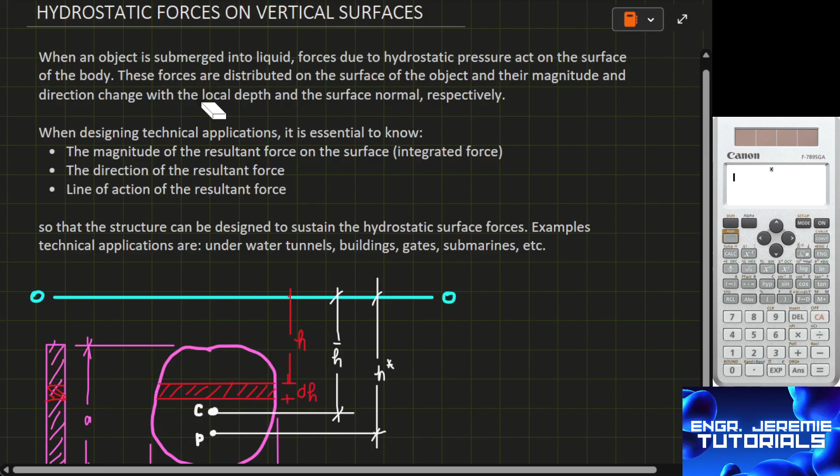When an object is submerged into liquid, forces due to hydrostatic pressure act on the surface of the body. For example, when we dive underwater in the sea, there is a hydrostatic force that pushes against our entire body, which is why we feel the pressure down there.

These forces are distributed on the surface of the object, spread across the total area of the surface, and their magnitude and direction will change with the local depth and the surface normal respectively.

So the deeper the object is submerged, the higher the hydrostatic pressure or hydrostatic force acting on the body. Therefore, there is a relation between the hydrostatic force and the depth or total height of submersion of the object.

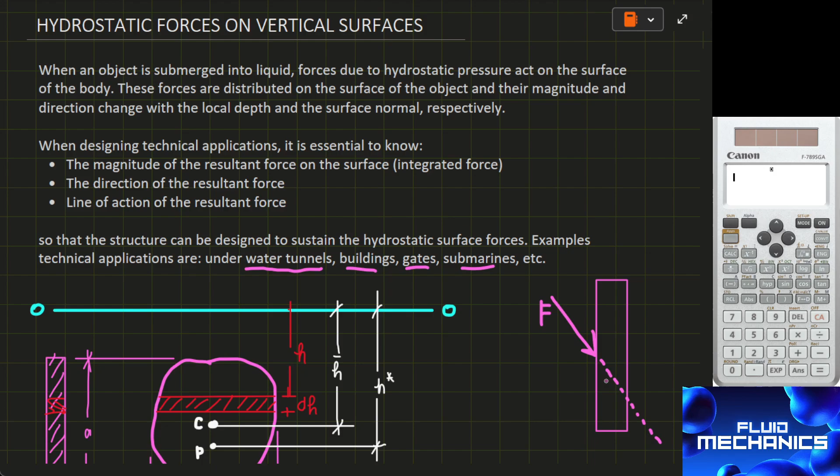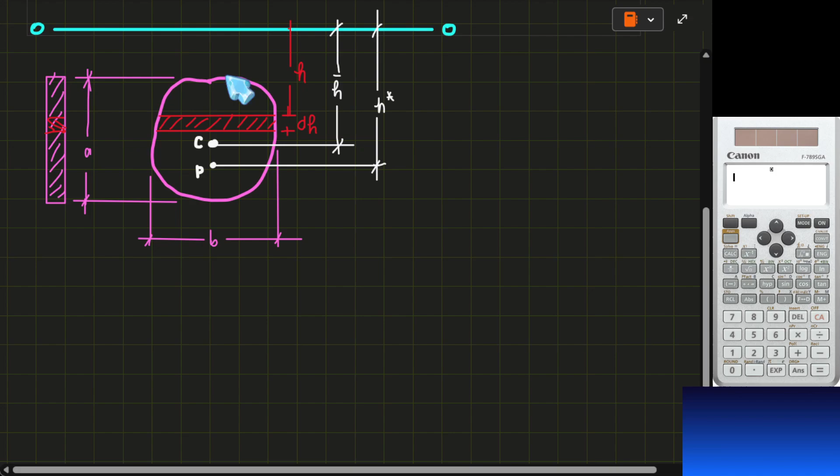Now, how are we going to solve for the total force F that hits the surface of the body? Okay, imagine we have a body - this part here. This body is submerged at a surface OO. So this is our surface, surface OO, with the body submerged in it. The point C here is the location of the centroid.

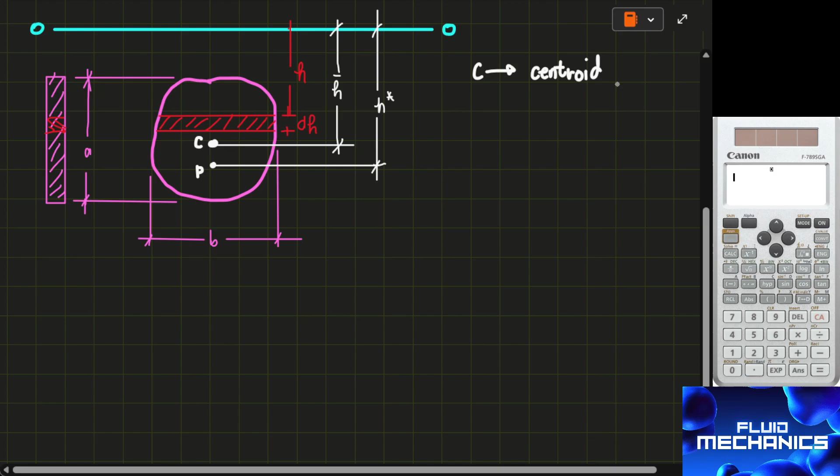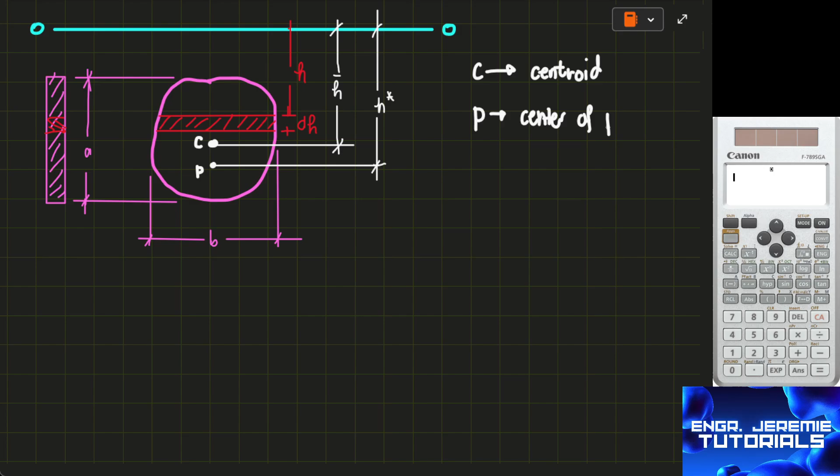The centroid - we've already learned what a centroid or center of gravity is, so that's where our center of gravity is located. And the point P here, this point P, that's where the center of pressure is located. The center of pressure varies depending on the shape of the object, because with respect to the moment of inertia of the object, that's how we locate the position of our center of pressure.

Now, in solving for this hydrostatic force on a vertical submerged plane surface, what we do is take a small differential strip here. With respect to that differential strip, we take the height h. This is our differential strip dh, with thickness dh, and its total length is our differential b, the total length there.

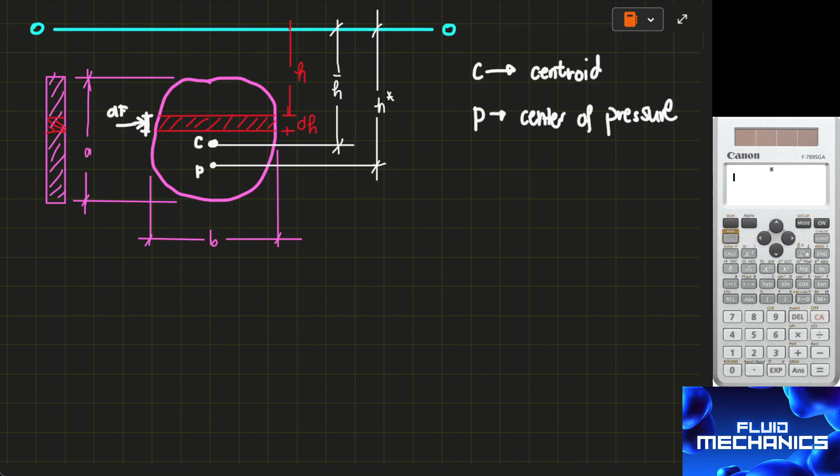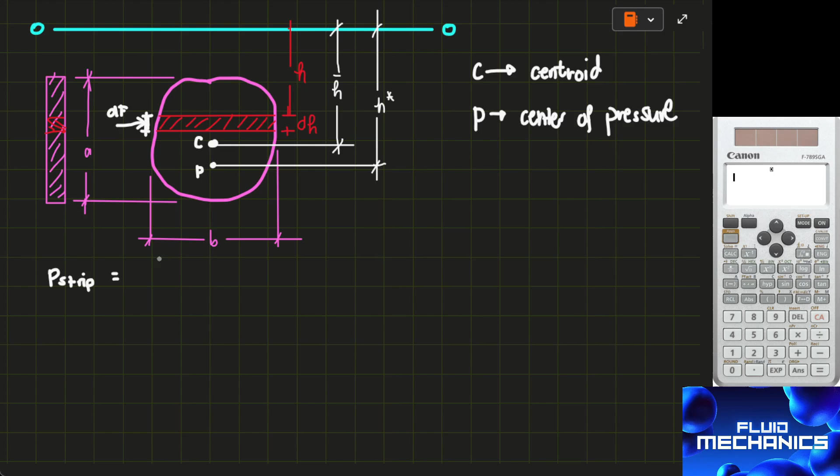Now, to determine the total force - if this is our differential strip, the hydrostatic force is the force that hits this strip. For example, the force hitting here, that is our differential force, dF. And solving for the hydrostatic pressure at that strip, that is equal to rho times g, acceleration due to gravity, times this h at the strip - rho times g times h, the basic formula.

Now, para malaman natin yung differential force na tumatama dito. Kasi 'di ba, pressure is equals to F over A. Since we have a differential pressure dito sa strip, para makuha natin yung differential force, itong rho GH i-multiply natin ng differential area o yung area natin nitong maliit na differential. Kasi itong rho GH is our pressure. Ang dF over dA is equivalent sa pressure kasi F over A ba yun. So itong dA, dalhin ko sa kabila, kaya nagkaroon ng

minultiply dito na dA. Now, to solve for the force on the entire surface, di ba, ang ginagawa natin is ini-integrate natin. So, integral ng dF is equal to the integral nitong nandito sa kabila na rho GH dA natin.

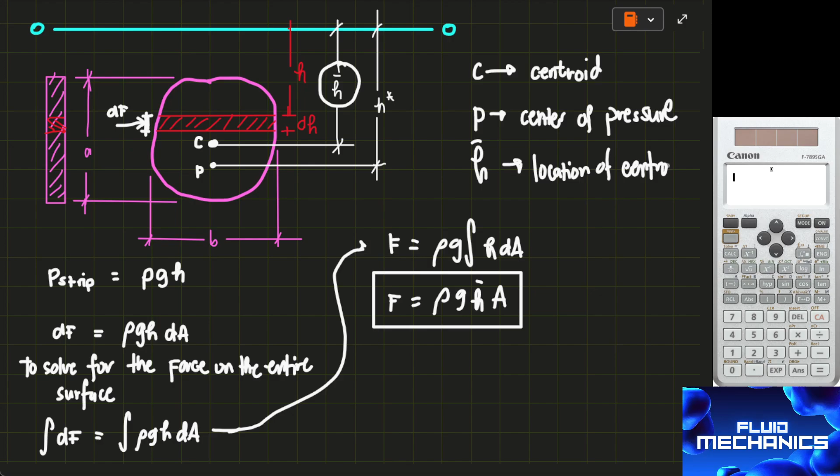Now, paano naman natin malalaman yung location ng center of pressure o yung H star natin? Kanina is H bar kasi may bar yan. Basta tandaan natin, H bar is the location of centroid or the center of gravity, yung location niya. Meanwhile, yung H star, location of center of pressure o yung COP natin. Yung P, yung point P na yan, yung H star.

Paano naman natin kukunin yung amount of the o yung height nitong H star? Okay, kunin ko ulit ito. Wait lang. Dito na lang. Now, from here, para mas madali ko siyang makuha, imo-moment ko na lang itong dalawang point, itong centroid at saka itong P from the surface. Okay, itong differential strip natin na to, kukunin ko ulit yung moment niya.

Differential moment, ito naman, location to ng center of pressure natin o yung H star. So, kukunin ko yung moment, differential moment nitong strip. So that is equal to the differential force, itong DF kasi siya yung tutulak doon sa differential strip natin. DF multiply by our H. Itong nandito sa H natin. Now, sabi natin kanina, DF is equals to rho GH times dA.

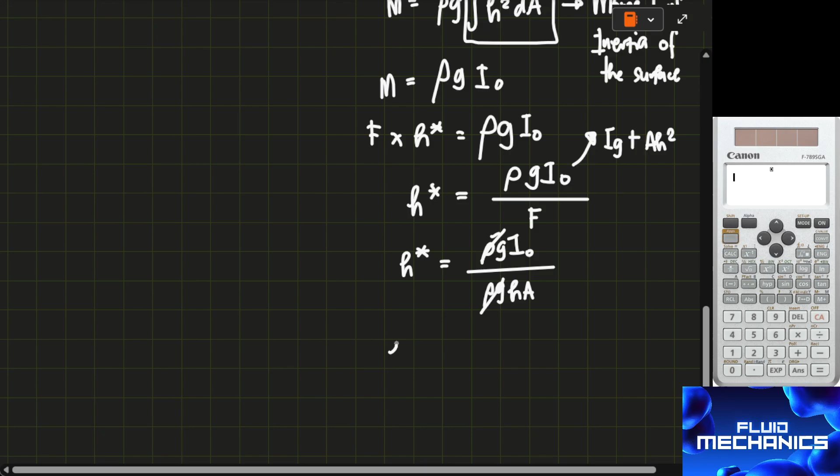So let's substitute. H star is equal to rho G I naught over rho G HA. But before that, this I naught, we can replace with IG plus AH squared. Now the rho G will cancel, so what remains is H star is equal to I naught over HA.

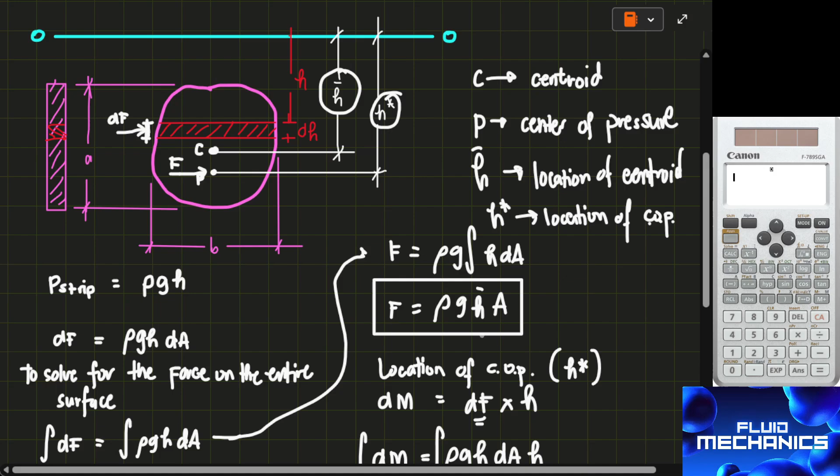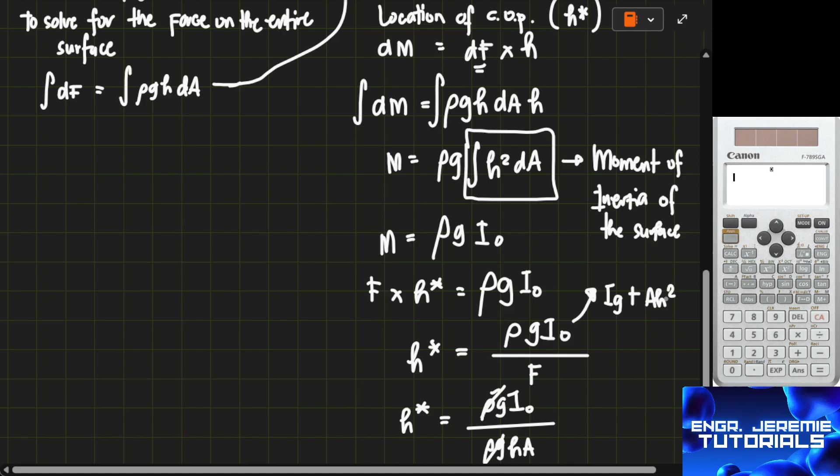Now this I naught, we can replace in terms of the moment of inertia at our centroid, using the parallel axis theorem. So we can replace this I naught with IG plus AH squared, where this is our parallel axis theorem.

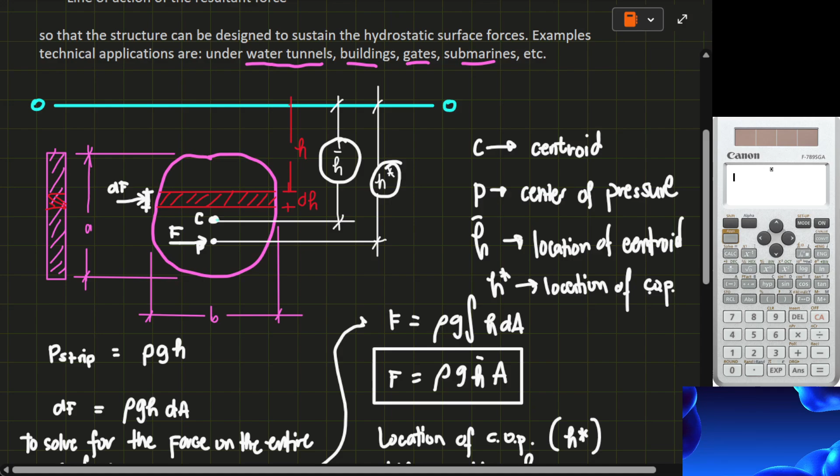This IG is now the moment of inertia of the surface at the centroid, with respect to the centroid. So our formula becomes H star is equal to IG plus AH squared all over HA or AH, which are the same.

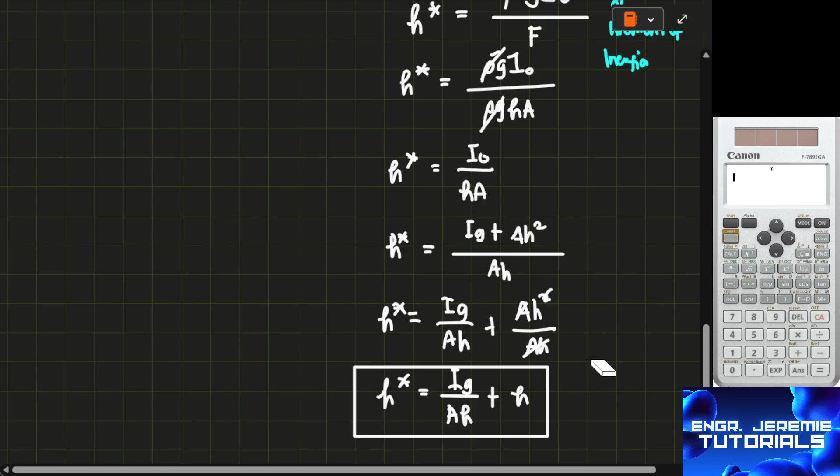So what is IG? For a square or rectangular surface, I is equal to BH cube over 12 for rectangular. It's different for circular and different for triangular, so you need to remember these formulas for moment of inertia. Let's try these two formulas we solved to solve sample problems.

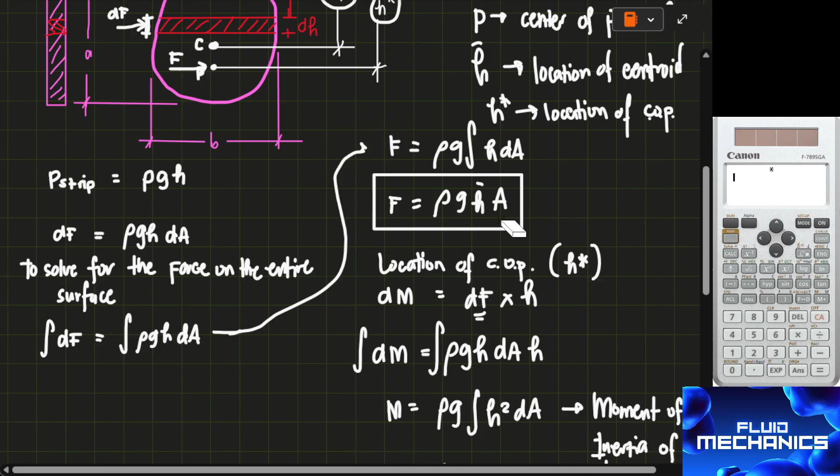This F is equal to rho GH bar A, and that H star formula, to solve sample problems. Okay, example: find F, the total hydrostatic force, and H star. Take note that the fluid is water. So we have a surface, a vertical rectangular surface, with dimensions length 3 meters and width 2 meters.

The vertical gate is level with the surface of the water. So if this is our G, then the total height from G up to the surface of the water is H bar. And if this is our COP, the center of pressure, its height from the surface OO is H star.

Now solving for F. Force F, what's the formula? Force F is equal to rho G H bar A. Now what is the location of the center of gravity for a rectangular shape like this?

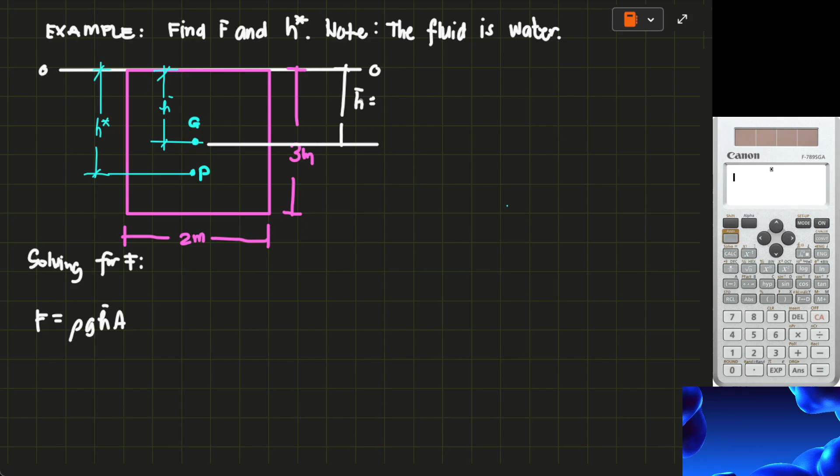That's simply half of the height, this H bar. For rectangular, from the surface up to G, the height H bar is half of the length. So half of that is 3 meters divided by 2, so H bar is equal to 1.5 meters. That's what we'll substitute.

F is equal to rho, density of water is 1,000 kilograms per meter cubed, times G at 9.81 meters per second squared, times H bar at 1.5 meters, times area. Our area is 3 meters by 2 meters, that is 6 square meters.

So this cancels, and this, and the meter cubed cancels. What remains is kilogram meter per second squared, which is Newton. So that's correct since the unit of force is Newton. Solving: 1,000 times 9.81 times 1.5 times 6, that is 88,290 Newton. Let's divide by 1,000 to make it kilonewton.

The answer is 88,290 newtons or 88.29 kilonewton. Okay, how do we solve for H star now?

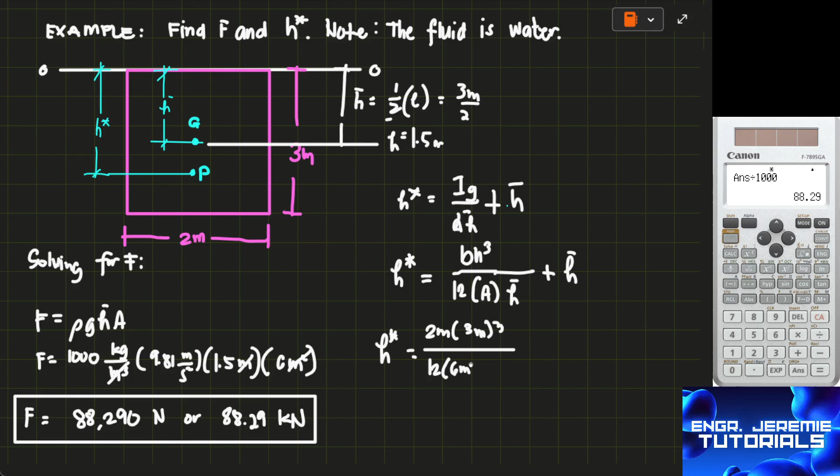So substituting the values, that's H bar. Our base is 2 meters times 3 meters cubed, since it's BH cube all over 12, over area of 6 meters squared, times H bar of 1.5 meters plus 1.5 meters. For unit analysis, meters squared times meters becomes meters cubed, which cancels the meters cubed here, leaving one meter plus another meter.

So the unit of H star is in meters. Let's use the calculator: 2 times 3 cubed, divided by 12 times 6 times 1.5, plus 1.5.

So all in all, our H star is equivalent to 2 meters. That's how simple it is to solve for F and H star.

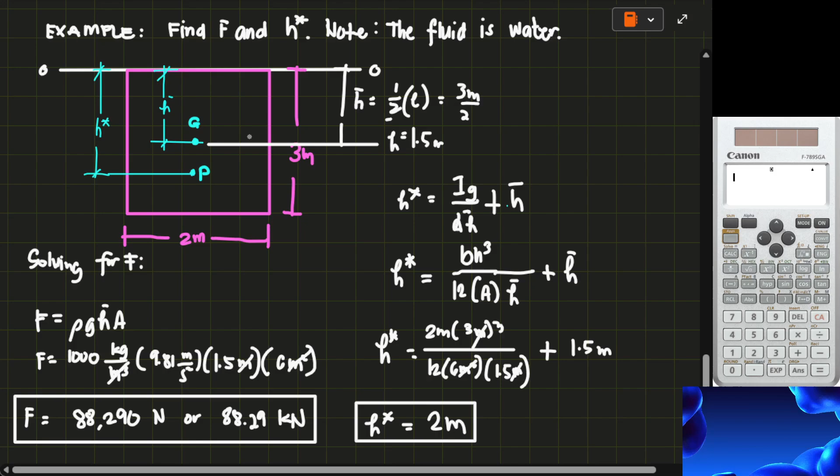So here is our another example. A vertical rectangular gate, 1.5 meter wide and 3 meter high, is submerged in water with its top edge 2 meter below the water surface. Find the total hydrostatic force acting on one side of the gate and the location of the force from the bottom.

Okay, para mas madaling ma-analyze itong ganitong uri ng problem, i-visualize natin siya. Drawing tayo ng surface ng water. Sa example, ito yung surface ng water. Then drawing din tayo ng yung vertical gate natin.

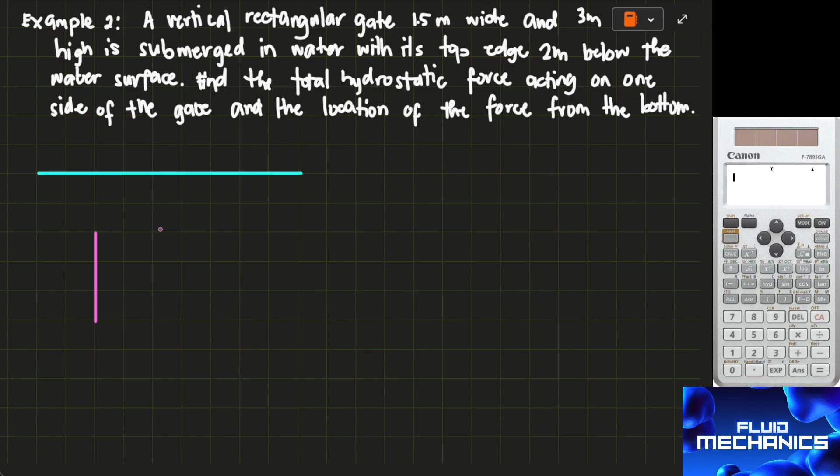3 meter. Ay, square na natin. So this is 3 meter high, 3M. And yung width daw niya is 1.5 meter. So from the surface of the water, galing daw dito, hanggang dito, this is 2 meter. Submerged pa yung top by 2 meter. Okay? So find the total force acting on this gate.

So yung center of gravity natin, syempre, nasa gitna. Tsaka di natin sure kung ilan yung nasaan yung location ng center of pressure. Okay, sabihin na natin na from here, straighten natin. Yan, ito yung ating H bar. At saka from here up to here, yan, hanggang dun sa surface natin. Ito naman yung ating H star. Kasi dito naman located yung P or the center of pressure. Okay? Madali lang to.

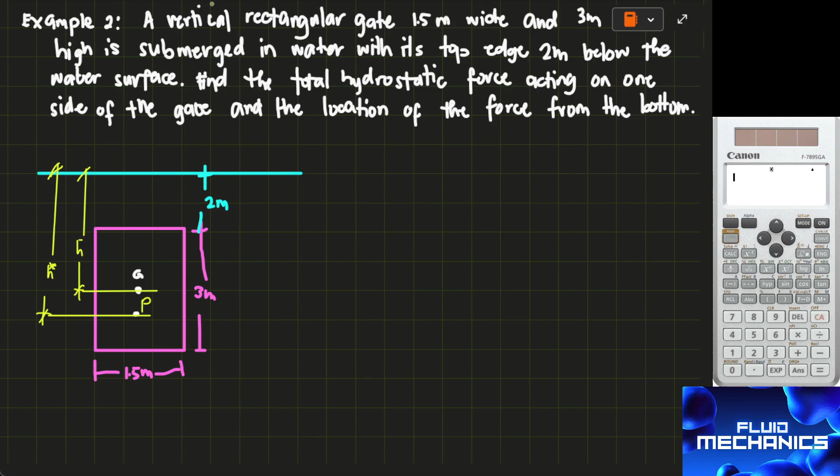So, to solve for F, F is equals to rho G H bar times A. Since this is water, wala naman sinabi kong seawater. So, 1,000 kilogram per meter cube times G na 9.81 meter per second squared times H bar. Ang tanong, ano yung H bar?

Or yung location nito? Kung papansinin nyo, since this is rectangular gate, from this upper part ng gate hanggang dun sa G natin, di ba kalahati yan nung kanyang height, which is 1.5. Kaso, kailangan i-add pa natin itong nandito sa taas, which is equivalent to 2 meter. So, therefore, yung H bar natin is equal to 1.5 plus 2 meter. Times yung area natin na 3 meter times 1.5 meter. Hindi kasya. Ulitin natin.

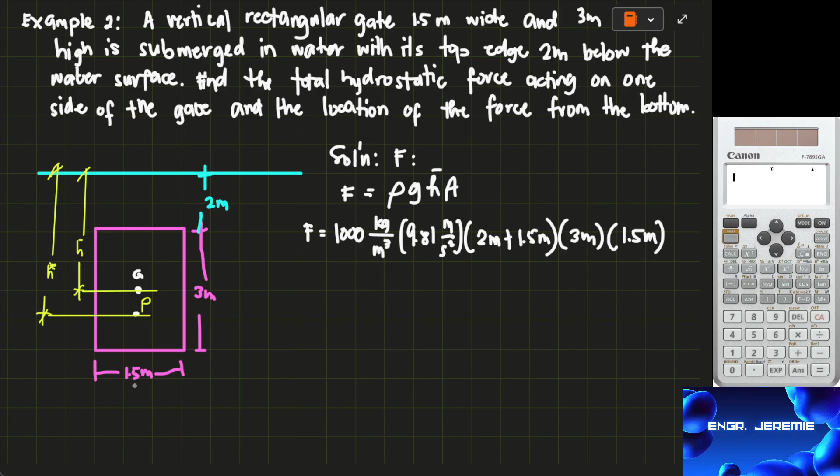So, F is equals to 1,000 kilogram per meter cube times 9.81 meter per second squared times 2 meter plus 1.5 meter times 3 meter by 1.5. Tama. 1.5 yung nasa ilalim. Use calcu. 1,000 times 9.81 multiply by 2 plus 1.5 multiply by 3 multiply pa by 1.5.

So, sagot natin is 154,507.5 Newton. Okay? Kasi yung unit analysis, yung meter dito, isang meter dito at isang meter dito, ika-cancel niya to. So, kilogram meter per second squared is Newton. So, divide na lang natin to by 1,000. Makuha natin yung F natin, which is 154.51 kilonewton. So, pwede na nating i-assume yan na ganyan.

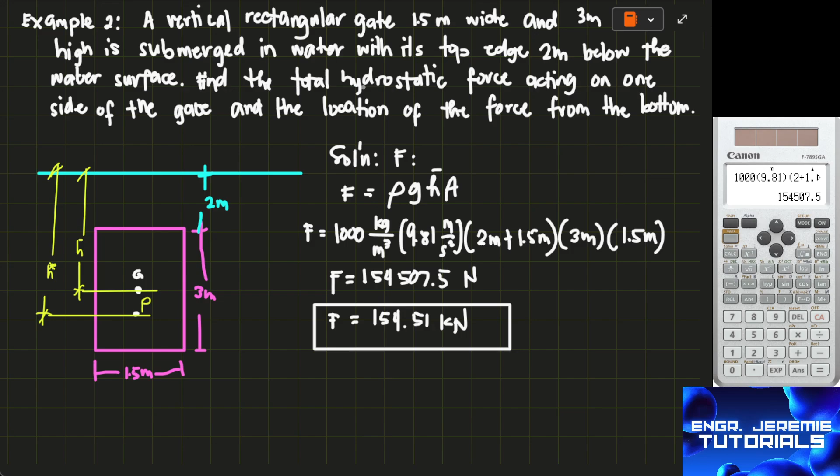Okay. Ano naman yung isa? The location of the hydrostatic pressure from the bottom ang tinatanong. So, paano naman natin yun isosolve? So, H star is equals to I G over A H bar plus H bar. Okay? So, H bar natin is 3.5. This is 3.5 meter. So, H star equals IG.

Ano nga yung ano nito? BH cube over 12 pa rin. Kasi rectangular. So, base natin is 1.5. Height is 3 meter cube all over 12 times area na 3 meter times 1.5 times H bar natin na 3.5 plus 3.5 meter. So, H star is equals to, calculator ulit,

1.5 times 3 cube all over 12 times 3 times 1.5 times 3.5 plus 3.5. Press equal. Makukuha natin yung sagot natin which is at 3.714 meter. Pero hindi yan ang tinatanong.

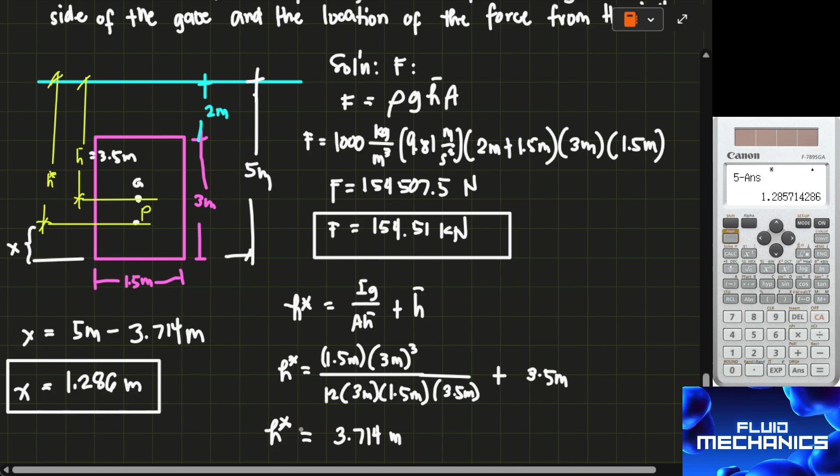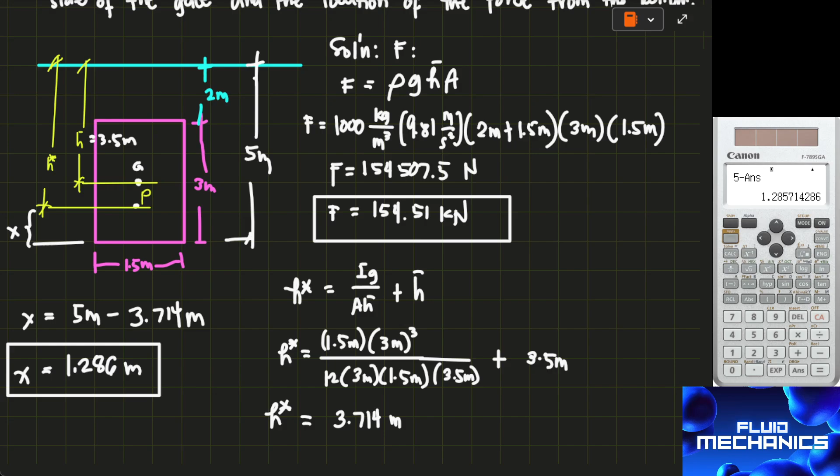Okay, so that's how you solve hydrostatic forces on submerged na nakasubmerge sa fluid. So let's try another. Try natin ang rectangular. Okay, I'll make a separate video na lang of this example number 3.